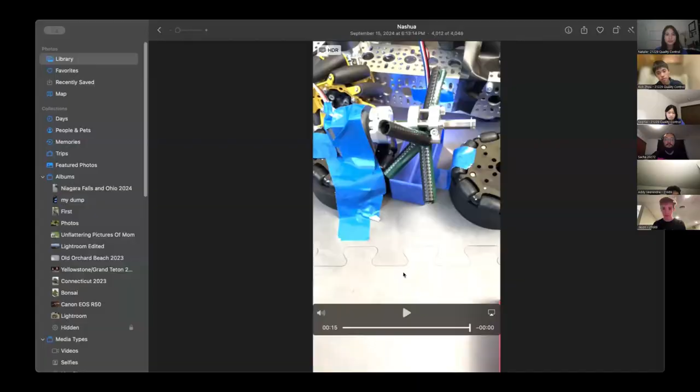I do. All right, can you guys see the screen? Yep. All right, so this is just a mock-up that we did of an intake. We just have some tubing on a servo, and it's actually on the side of our chassis. So we have a color sensor taped to it, and we're using the Rev Color Sensor V3, so it can detect both proximity and color.

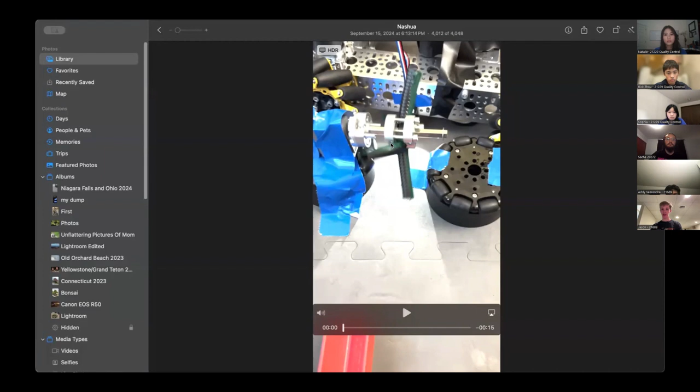So what we do in this example is we detect when a sample has entered the intake within an inch or so. Once it has, we stop, we detect the color, and if it's not blue in this instance, we will spit it out. So let me show you that.

Yes, so that's definitely one way to verify you have the right color and that you have a sample during autonomous. Yeah, I agree, I think that's a really smart way to spit out the wrong color during autonomous period. I feel like especially during this game's challenge, because colors are just so essential to the game, using color sensors such as Limelight will be really essential.

Rick, what do you think? Yeah, obviously we're going to need a color sensor. Using camera detection for verifying the identity of game elements is probably not the most efficient. In terms of that intake you just showed us, how do you expect to pick up game elements that are horizontally oriented with respect to the noodles?

That intake was just really a mock-up to allow us to bring the samples close to the color sensor. In our final iteration, we intend to have some sort of wedge, so as samples enter, they are oriented, in this case, to a vertical orientation, but we're definitely considering using a horizontal one as well. The reason we like vertical so far is that it's easier to prevent multiple samples from being intaken, whereas with a horizontal one, two samples could potentially get stuck like this.

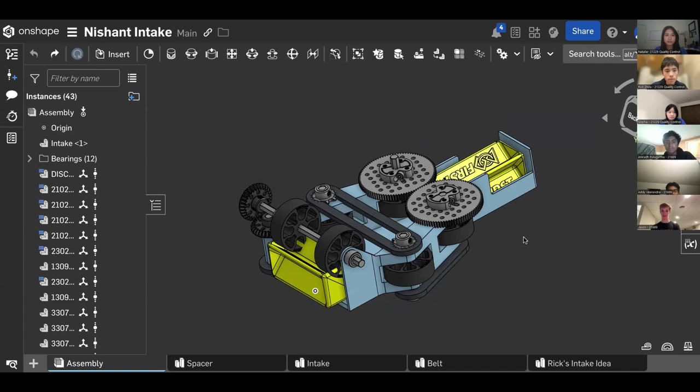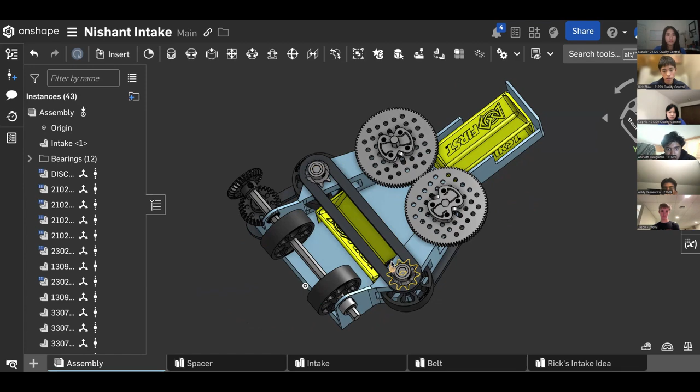This is what I was talking about with a compliant wheel intake. Over here we have two compliant wheels on the top that force the sample into the robot. Afterwards, we have two wheels, both rotating either clockwise or counterclockwise instead of rotating in opposite directions like normal intakes might have. This has the effect of rotating the sample so that it's in a vertical orientation and being able to be fed into this back chamber here.

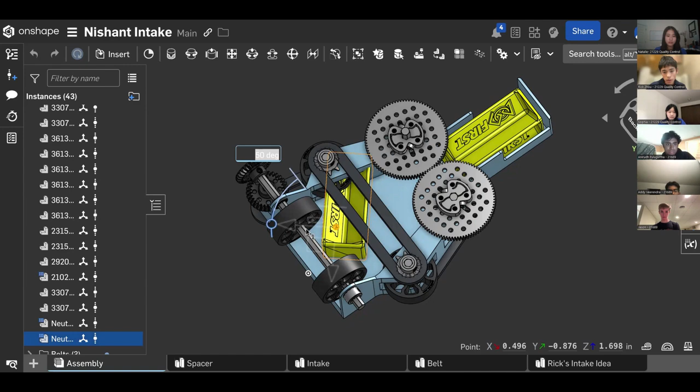One issue we noticed with this design is that even with this active orientation, and not just a wedge, the sample kept getting stuck when it was in about this position here, where this compliant wheel kept trying to turn, but the top left corner of the sample got rammed against the wall, and the sample just gets stuck there.

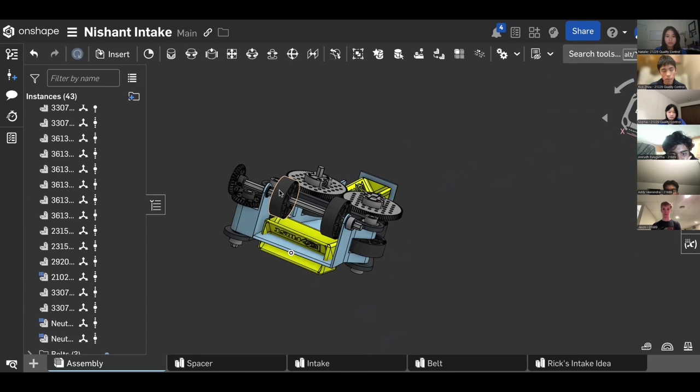Of course, we could also try other things on the top, such as noodles or goBILDA boot wheels, and those are certainly things we could try. Does anyone have any questions regarding this, or any thoughts for how we could improve this design?

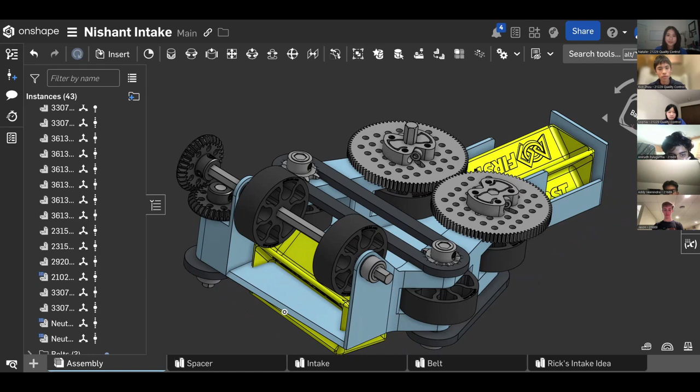Okay, it appears not. I would just be concerned about weight. Yeah, that's definitely a disadvantage. This is more of a proof of concept, just a first prototype. This is decently heavy, especially if you're using a deployable intake mechanism. If you're going to mount this on the slide, this is certainly going to be infeasible.

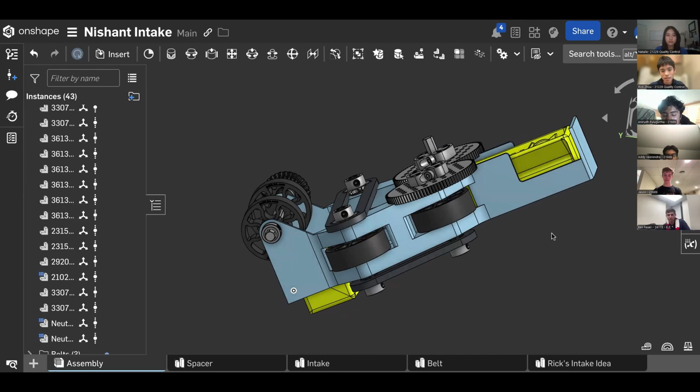Another consideration is that you have to angle this intake downwards, otherwise the compliant wheels won't be able to hit the specimen if it's flat against the ground. If I reorient this, if the specimen is just flat against the ground, then these compliant wheels won't even be able to touch the sample until much later. So that's definitely another consideration.

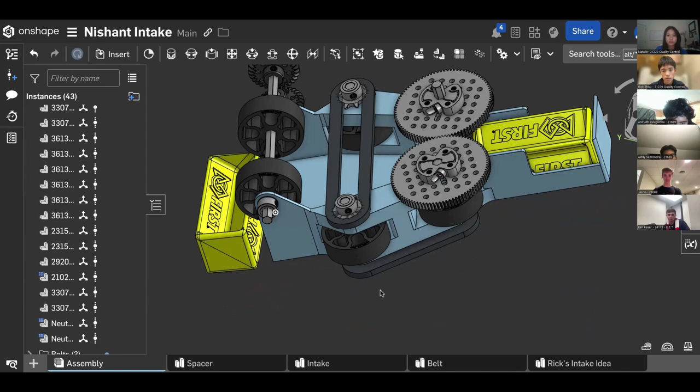And also, we're going to have to mount a servo or a motor somewhere, and that placement is definitely another issue to consider. So this was just one of our early prototypes. I'm going to show you guys another one, which is a claw intake. Give me a second.

It appears that I cannot find it right now. Yeah, I lost the document. How unfortunate. Okay, yeah, we can move on.

That's all right, Rick. Thank you so much for sharing the CAD design with us, it was really helpful. Other than that, are there any final thoughts or questions specifically on intake design before we move on?

I have one question or comment for everyone, and I'd like to hear everyone's thoughts. I know that this season, even more than Center Stage, there's definitely going to be variations of designs that use motors for intakes or servos for intakes. What do you think we'll be seeing most of this season?

Personally, I think for this season we'll see a combination of both, but motor intakes are probably going to be a lot more prevalent, especially because you sometimes need that extra power for preventing jams. Servos historically have been known to get stuck sometimes or break, especially since there's a limit on total extension. In past seasons, one drawback of using a motor is that it's heavy and you have to move it around, but this season you won't have that much extension anyway, so having a motor could certainly be a lot more helpful.

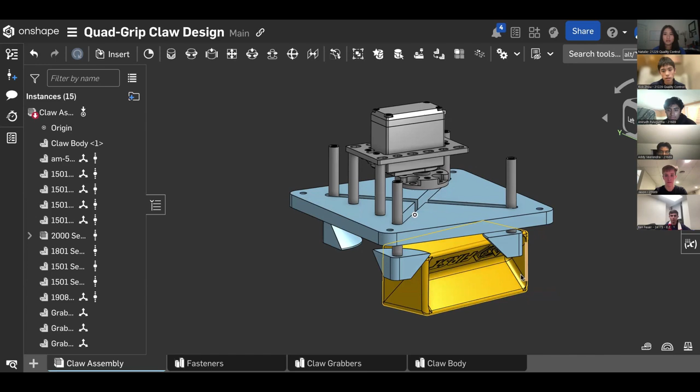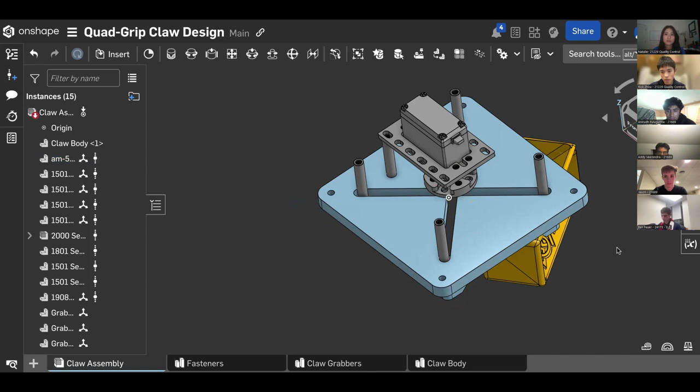So this was just another idea for a type of intake. It's kind of like a claw, but the main issue with claws is you have to have the sample in a specific orientation. What this type of intake does is you can intake a sample regardless of whether it's here or if it's rotated. Let me find the rotation button. Doesn't seem like I can find it right now. Or if it's rotated at an angle over here, the claw will always right the sample so that it's in the correct orientation and be picked up.

One issue with this is that transfer is going to be slightly more difficult, because after you finish intaking, it's either going to be horizontal or vertical, one or the other, and you have to create a transfer system that accounts for both of these. One nice thing about this is that it only uses one servo, and it can pull these arms inwards and outwards all at once.

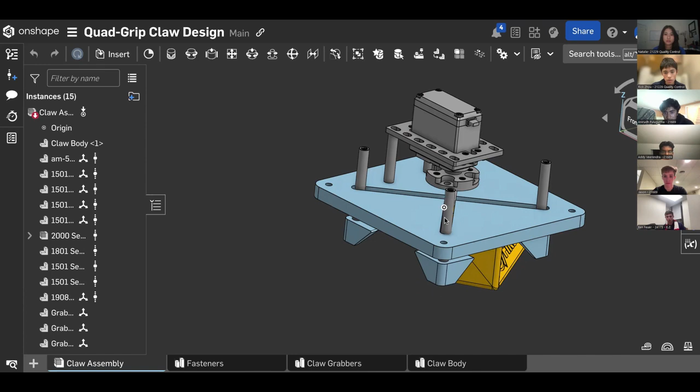Does anyone have any questions regarding this design, or any comments? Yeah, I had a comment. That seems like a really interesting design. It seems like it would do a much better job than a typical, traditional gripper. If you can figure out something for the orientation, maybe some kind of wall structure, that might help in terms of orientation. But overall, it looks pretty good.

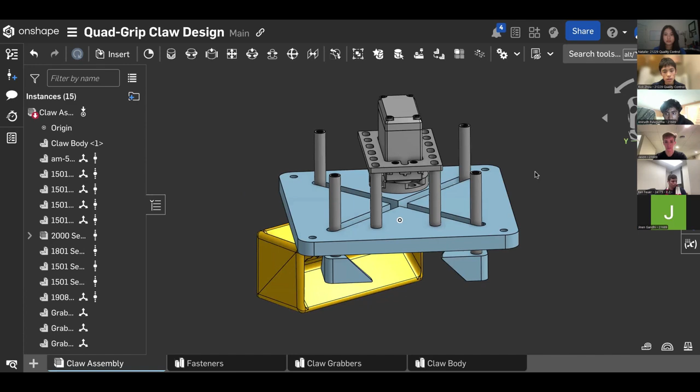One primary issue with this intake design is the samples are going to be scattered randomly in the space where you pick up samples, and if there's two samples nearby, this might struggle with that and get stuck. Also, one other part of this intake is that there's enough space, for example on the side, where you can mount color sensors and detect the color of the samples. But it's kind of hard to just move on to another sample if you find out your sample is the wrong color.

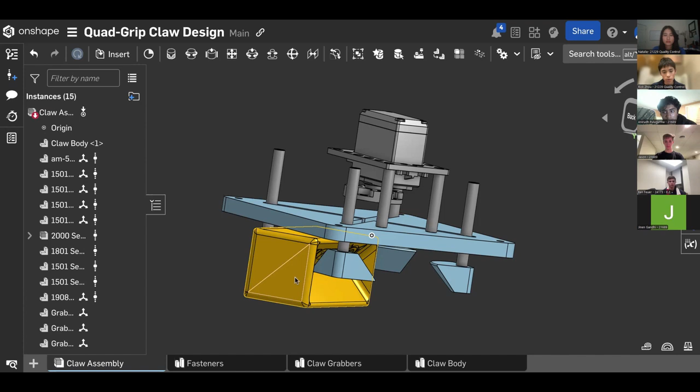Speaking of that, this season there's only a minor penalty for picking up your opposing alliance's samples, and if you can pick it up and score it fast enough, you'll still have a net point gain. So I was wondering whether anyone else had any considerations regarding spitting out samples versus just scoring them as fast as possible and still getting those points, even though you get that small minor penalty.

Oh, apparently they have changed the rule to a major penalty, so never mind then.

On that note, what other designs or ideas do we have for intaking the sample all the way to scoring it, specifically scoring specimens onto the bar? I forgot what it's called, but how are we thinking, like what types of outtake designs should we use that are probably most suitable for scoring specimens?

I could definitely see for a lower level arm, or for a higher level, linear slides on a pivot being used this year, because it really allows you to both intake and outtake out of the front and back of the robot, and it allows you to do so even if you have another mechanism like an intake. So you could pivot forward and score the specimen on the high rung, and then immediately after letting go, you would have a separate intake mechanism that can immediately grab another sample.

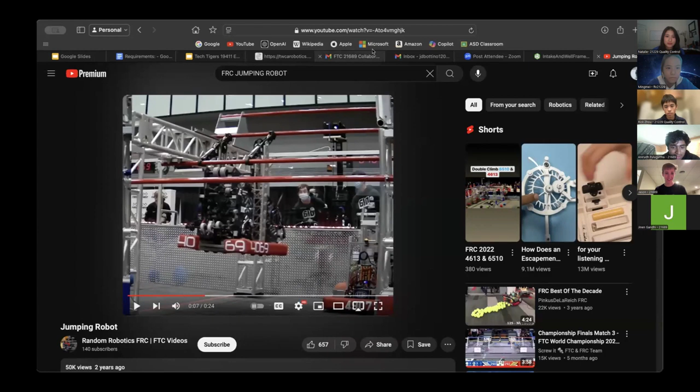Mingmei, have you found it? Let me check, I think I have it. I can share it. Oh, if you really... Oh yeah, that's great. All right. Sorry, I'm unmuted now. Can everyone see it? Yeah, sounds good. All right.

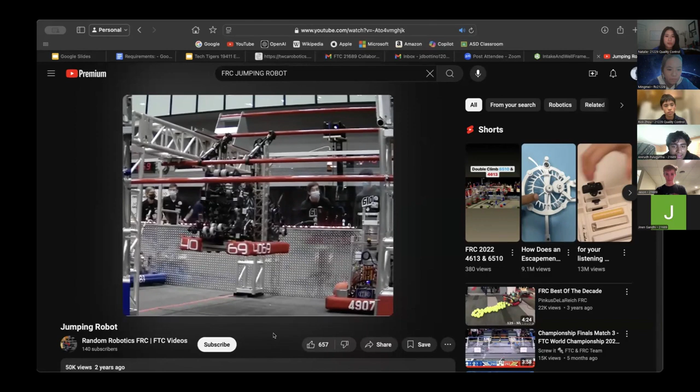Wow, I think for this robot, it uses another thing banned in FTC, which is using an air piston to generate that momentum down. Yeah, but I still think it was a pretty fun design to show, you know?

Totally. Also, if anyone wants to see a different link, it's also in the chat, I think someone sent it out. Okay, other than taking inspiration from FRC, does anyone have thoughts on how we should design the hang so it can be the most efficient and most optimized?

Yeah, actually, I'd like to talk a little more about that jumping robot. If you're going to get that robot into the air, you need to do one of two things. One, build up momentum within the robot itself, like that FRC robot did, by thrusting up a large block of metal, which gained momentum and allowed the robot to jump into the air. The other is to push off of the ground, which is an issue because the tiles aren't exactly the most rigid surfaces. If you're pushing down, it's going to push into those tiles, and you're probably going to get a ton of penalties for field damage if you don't design the right type of pushing mechanisms.

But in terms of jumping, we could probably do something similar, but not entirely like jumping all the way up to the high bar — just jump a very short distance, like 1 or 2 inches, and get yourself off the ground. Then in that time, you quickly latch onto the high bar and hang directly onto it. I believe the rules in the game manual only state that you can't make contact with the high bar until the robot is completely suspended by only the low bar. But in this case, the robot isn't suspended by anything because it's in the air. So that's definitely something to consider. Does anyone else have thoughts regarding this?

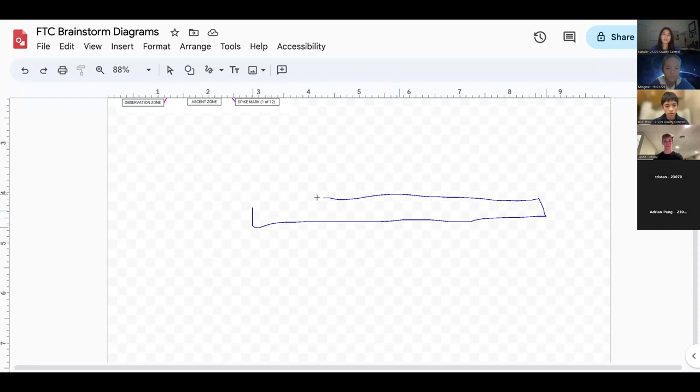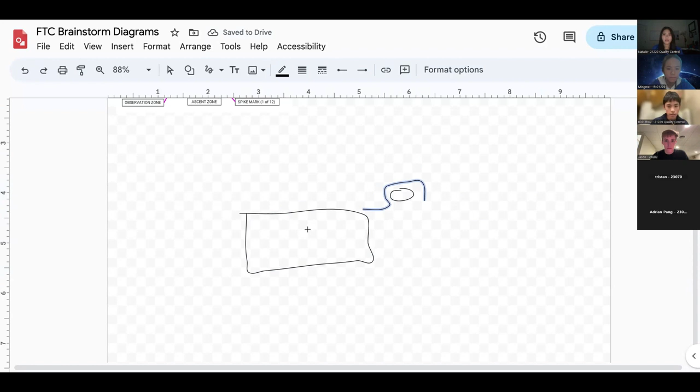So if this is the bar, you want to have your robot and then a hook on this end of the robot. And then as you retract it, it's going to start making the robot more into a vertical position. Is that right? It's not going to be completely vertical, it's going to be more like this.

What do you do after this? We put a slider, there's a slider we're gonna test. I'm not sure where, but there's a slider at that position reaching out to the high rung, and then we just lift it. Something like that, over here. We're not sure about the angle, we're gonna test out the angles, but there's basically gonna be a slider reaching out to that high rung.

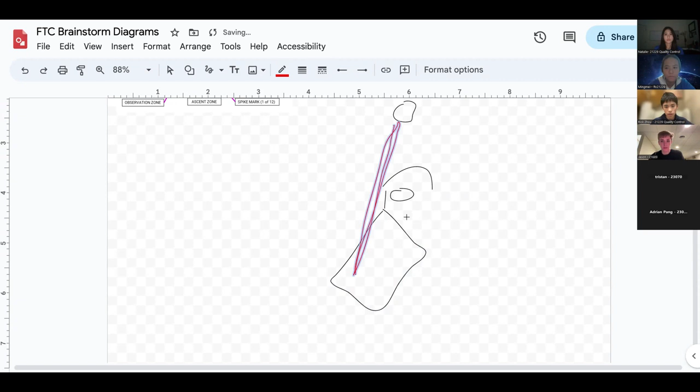I think one issue with this is that, as you can see—let me use a different color—over here, this bar... wait, why can't I draw? This isn't working. Give me a second. So I still can't draw.

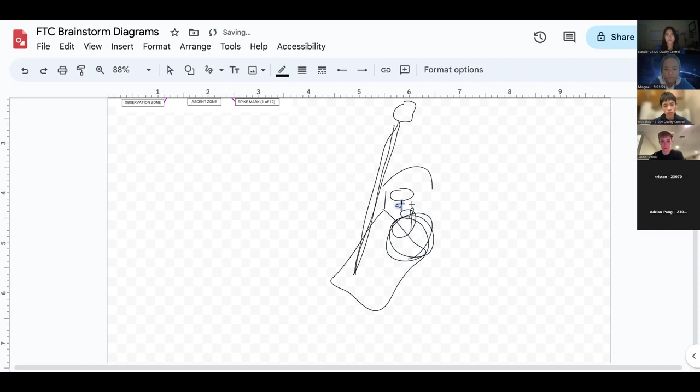Over here, this portion of the robot is going to come into contact with this low rung, regardless of how your slide is pulling it up. So the one thing you have to consider is you have to find a way to push the robot off to the side in this direction so that the robot can be completely clear of the low rung before you retract the slider and go up to the high rung. So do you have any considerations regarding that?

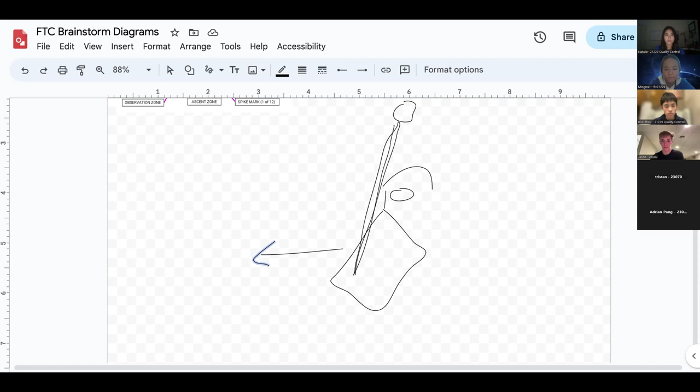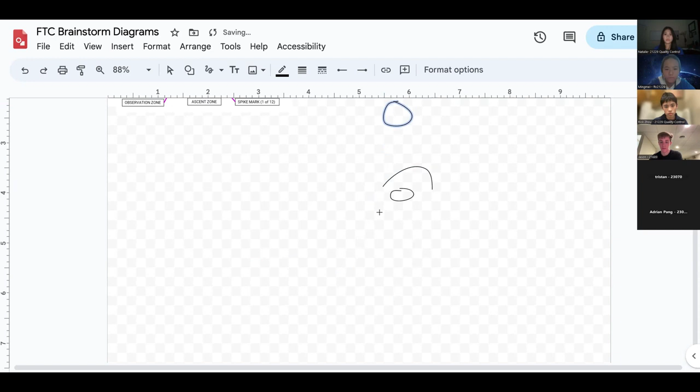I don't really have too much considerations, but my only plan is to put the hook really low so that it actually goes to a more vertical state, to hope that the high rung motor has enough power to pull it up past the low rung. So vertical position as in like this.

Can I share screen? I can draw. Yeah, okay, go ahead.

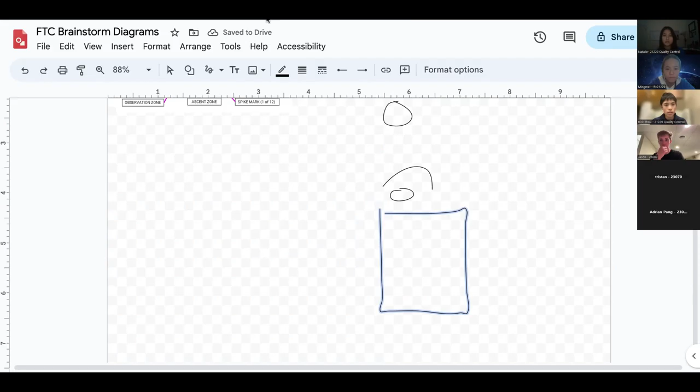Wait, sorry, I'll use paint. Okay, so basically this is our car, and then there's a low rung, high rung. I hope we're gonna put it really low, like at the bottom of the slider, so that if it hangs, it's gonna be something like we hope it goes like this.

Somewhere like this, so we can put a slider around here to hang it like that. I think this should be less than the 42-inch. I'll check my measurements.

No, but I want to ask about the 42 measurement. Is it the longest possible when it's fully extended should be less than 42, or just that in the game you cannot extend it past 42?

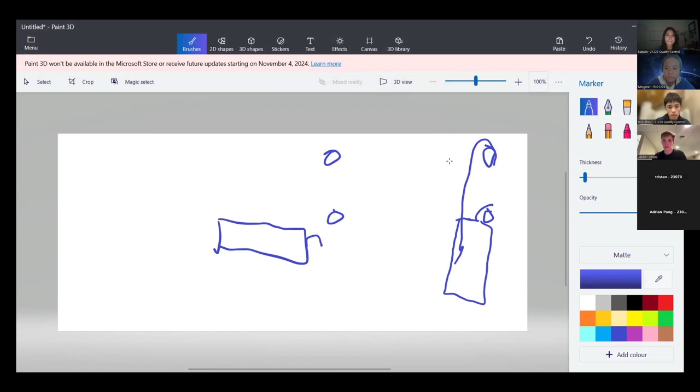I believe you have to demonstrate that it cannot extend beyond 42. I'm not entirely sure whether the longest possible is less than 42. Since I checked the game manual, it didn't clearly mention about it. So I think one thing that... oh sorry. Yeah, go ahead, go ahead.

I think one thing with the 42-inch extension that we have to take into account is that it's fixed. So during inspection, you put your robot in the tape box, and from that position in the box, all the things extending can't extend beyond 42 inches, but the box isn't dynamic, it's fixed.

So during a match, let's say the box is like this, and the intake came out to here, and the rest of the robot was here, the intake can't suddenly go out the other side because the box is fixed. I'm not sure, in the case of your hang design, is the box fixed even when the robot is pivoted off the floor plane? Because then you'd have a difficult time extending out the front since there wouldn't be much space left.

Can you repeat that? I don't really get it. Yeah, here, let me find this. Maybe I'm muted, we'll see. No, I'm not muted, I'll find it and get back to you in a second.

There's a really good YouTube video that demonstrates it well. Okay, sure, thank you. Actually, I had another thing to bring up for your hang. I'm gonna share my screen for a video.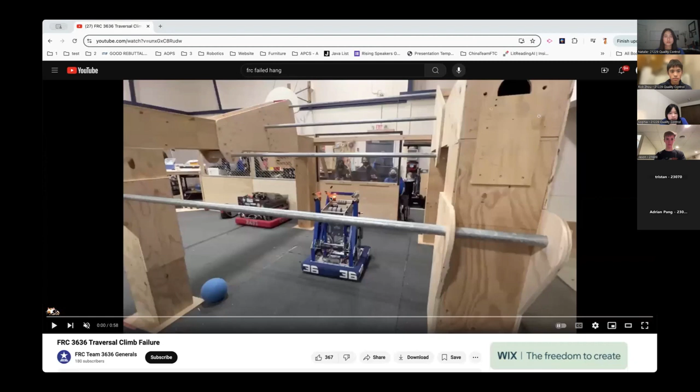So this is an FRC hang, and I don't know if this is what your hang mechanism will look like, but what they do is use slides to go onto the first bar, and then extend another set of slides to latch on to the higher bar.

Yeah, I think we're basically trying to do something like that, but there's I think two FRC games, or one, I'm not sure, that uses traversal climb, but the difference is these are diagonal and ours is vertical now. So I think that's a really big difference.

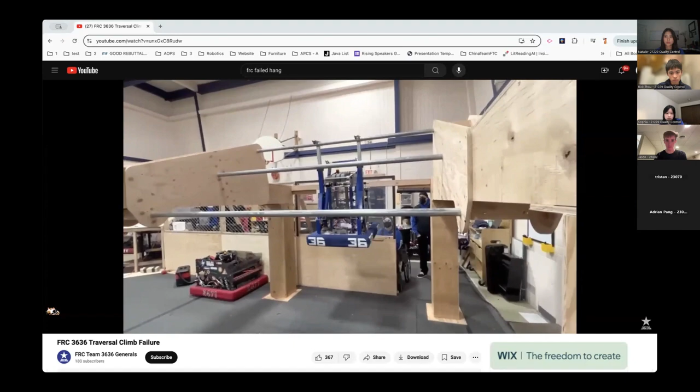Oh, I see, so you would extend kind of just vertically up and not diagonally. It's still at an angle since if you extend vertical, it might hit the low rung. So that's one of my other considerations, but I plan to just have a prototype first before maybe making some changes to my design.

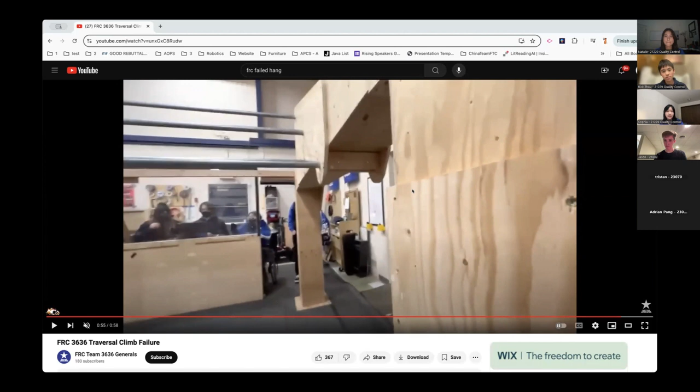Yeah, definitely, but this is just something I'd consider after you hang, like the swinging of the robot. Yeah, yeah. I think one more thing kind of related to making sure you're able to counteract that center of gravity thing is...

You can do a bunch of physics — we were planning to have a pivoting arm, and one thing you could do is once you latch onto that first bar, figure out what the exact angle is optimal such that the slider is either externally tangent to the two bars or internally tangent to the two rungs, and you could hang like that.

Yeah, I think that's always something we can do, except you're going to have to do quite a bit of tuning, even if you do those calculations beforehand, because what actually goes on with the robot and the rungs isn't necessarily what you would calculate beforehand.

I've put the horizontal extension thing in the chat. If you'd like, I can share my screen and play it. Sure, sure, yeah, let's have you share your screen.

All right, can everyone see? Sounds good.